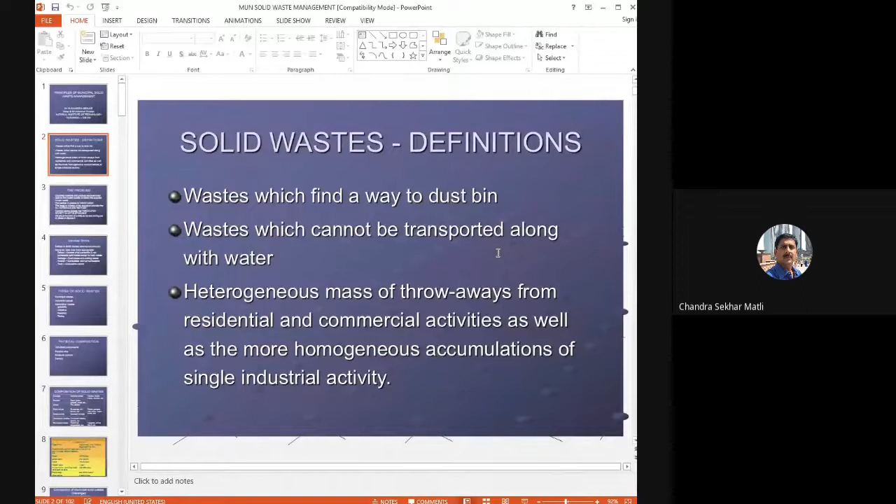Now what is the problem? Why are we talking about solid waste? Because we have been living on the planet for several years, decades, centuries. If you really look at the solid waste problem we have, you find countless materials.

You go and see a dustbin - what do you find? You find paper, food waste, vegetable waste, plastic, thermocol, leather, glass, metal - all kinds of things, at least 10 to 12 items found in the dustbin. In modern society, as you use more and more materials, the dustbin is flushed with more and more different kinds of waste. The additional aspect is about variety, diversity of waste.

The second thing is the quantity of waste. The tradition and practice today is only throwaway - that means you go anywhere today, you find a throwaway society.

You find a throwaway cup, throwaway napkin, throwaway kerchief, throwaway plate, disposable pen - all kinds of disposable items. The order of the day is disposable.

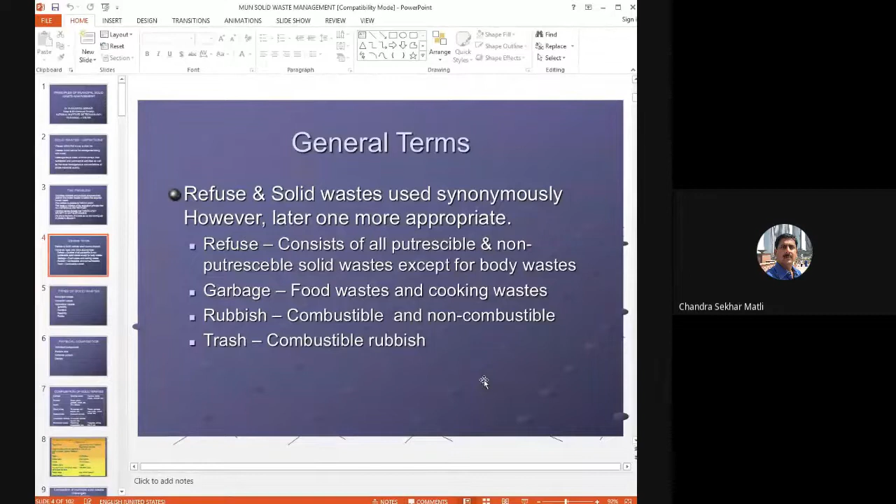Then what are different types of municipal solid waste? You have municipal waste, which is mostly from residential and commercial. Industrial waste is not included in municipal waste because Government of India and several other governments across the globe said industrial waste has to be dealt with by the industry on its own. Municipality is not responsible for dealing with waste from industry. So industrial waste means the homogeneous materials that come from a single industrial activity.

Then you have hazardous waste. There are some wastes which are hazardous, like hospital waste, radioactive waste. So these are some examples of hazardous waste, meaning they are very, very dangerous.

In what way are they dangerous? Hazardous waste essentially has these properties in combination or in isolation. So what are the properties which make waste hazardous? Waste which can ignite or burn, that is what is hazardous.

Waste which are highly corrosive. That means chemically they create action like acids.

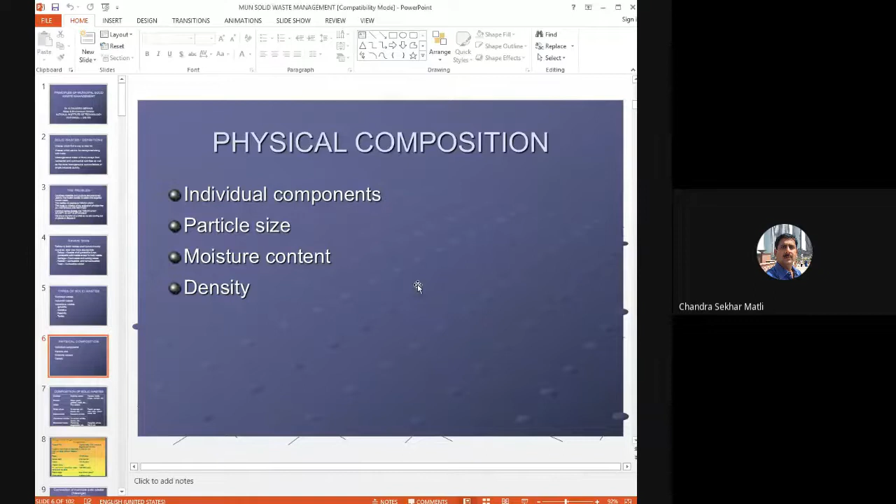Now, when you look at the physical composition, you see what the waste comprises of. I told you garbage. In the residential sector, you have rubbish - paper, glass, plastics, metal, etc. Then ashes, fire residue. With the use of LPG, you are no longer using wood or coal, so you don't have as many ashes, but still ashes can be a component of solid waste. All these items come from houses, hotels, shops, markets, essentially from residential activity.

Then street refuse - that means on the road, which is also part of urban area. So what you get is sweepings, dirt, leaves, etc. Whenever you clean the road, you get sweepings, mostly soil and other materials. Then you get some dirt, some leaves, flowers, and similar things that are thrown on the road. And if you are not a very conscious citizen, you throw paper cups, plastic, anything and everything on the road - all these will be present in street refuse.

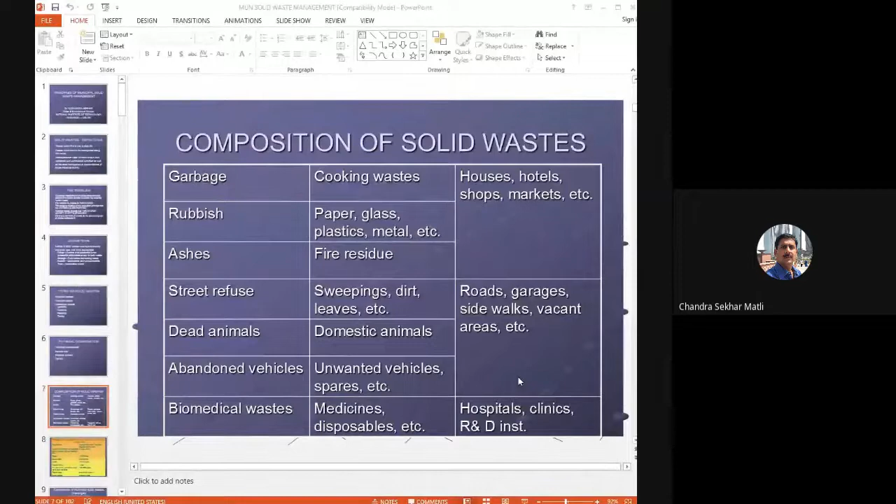So all these are again where you find them in hospitals, clinics, and R&D units, which are linked with the things. So these are general sources and different kinds of materials that you find. But now, if you really look at the behavior of these materials, you see what is the behavior of these materials and why we are really interested in dealing with these materials.

Say, first thing, you find a lot of organic waste such as vegetable and fruit peel waste, leftover foodstuff, leaves and all that. And in India, at least 40 to 50% of the solid waste that you generate, that means out of 0.5 kgs that I was referring to, 0.25 kgs or 0.2 kgs is only organic waste such as vegetable peel waste or fruit peel waste, leftover foodstuff, leaves from the street and all these.

So what is the time for them to decompose or degenerate into different material? Generally 7 to 15 days. Whereas if you go to paper, paper is a significant component that you find in the dustbin. It is 10 to 30 days, which is slightly larger than the food waste.

Then cotton cloth which you throw away, maybe used cloth or some torn away cloth or whatever, that is 2 to 5 months. 2 to 5 months.

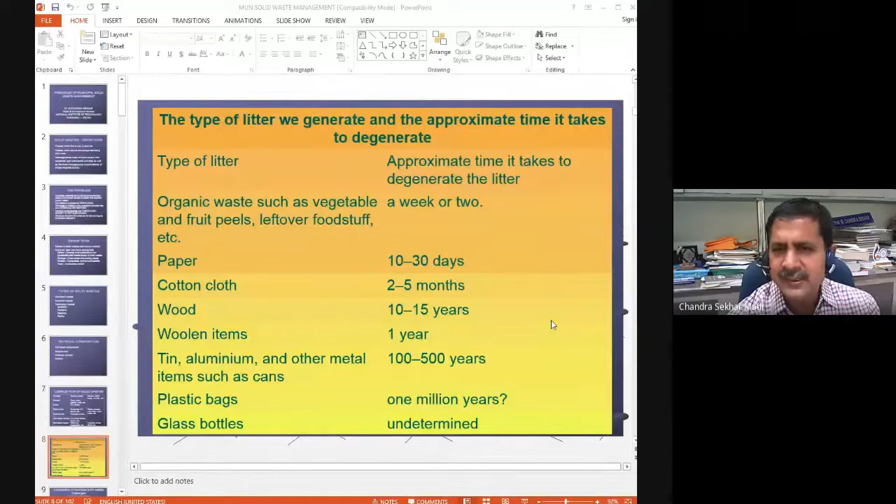Then glass bottles: your soft drinks, your cool drinks, all kinds of drinks that you get, soda, dairy milk, all these, undetermined. That means the time taken for decomposition of glass is undetermined. That means literally it is not possible. So it is not fancy or advisable to throw away glass or to break glass. Right?

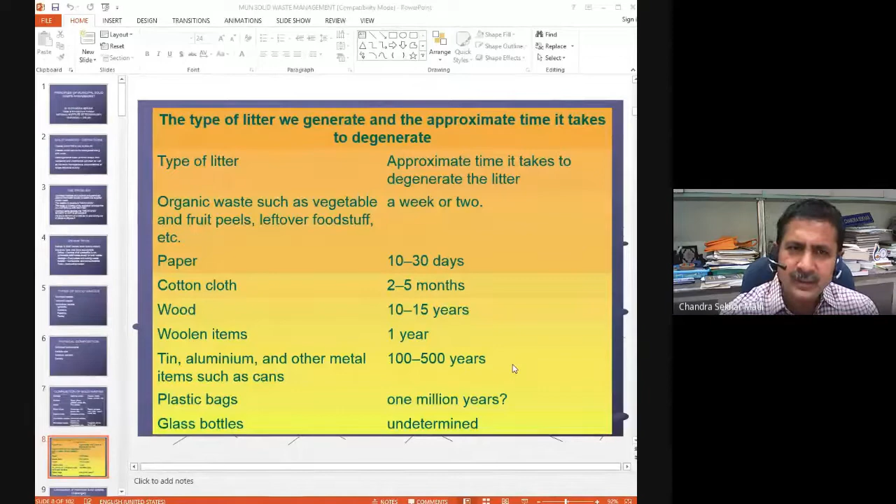So next one. Okay. Now to take you onto the ground. Say in Warangal, we have taken up a study where we have found out what are the different materials found in the municipal solid waste of Warangal. Organic matter, 46%. Soil, that means sand, street sweepings and all that, 36%.

And literally speaking, if you separate organic matter and soil, 82% is gone. Your problem is only 18%. Soil can be easily disposed, no problem, if it is separate. Organic matter can be easily handled. That's what we will be talking about today, which organic matter is supposed to go to composting.

That is 46%, which also poses no problem if it is separated, if it is segregated, if it is present in isolation. Unfortunately, what happens is it is not present in isolation.

Participants are calling me. Hello? Yes? Yeah. For the FDP, if you have any issues, you call my research scholar. I am in the session. Okay. I gave instructions that you should not call me.

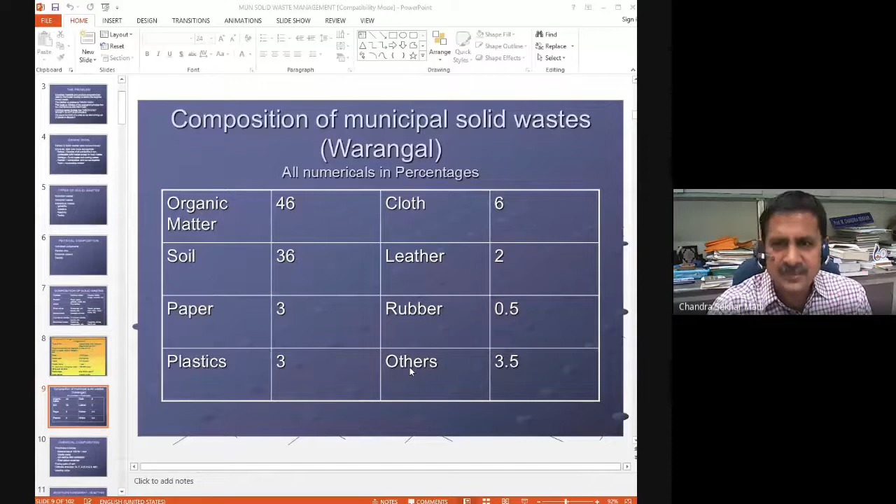Now, you have done your physical composition. That means you have separated materials, you have found out their density, their moisture content, all that. But now the next aspect is chemical composition. What chemically is this material? So for chemical composition, what are the properties that you try to study? First one is called proximate analysis.

Proximate analysis, where you try to find out the moisture that is lost at 105 degrees centigrade for 1 hour. That means when you heat the solid waste at 105 degrees, how much moisture will be lost? Why 105 degrees? Water will go into the vapor state. Then volatile matter, and ash residue after combustion. What I mean by ash residue is, if I burn 1 kg of waste, how much ash will I get?

Say if it is paper, I get less ash. If it is wood, I get more ash. That is why we try to find out the ash residue after combustion. Then finally, fixed carbon: what is the carbon that is remaining in the waste? Even that is important. When you burn, you will get ash, but this ash will be in dust form. I don't want ash in dust form; I want to convert it into a solid form, a brick or a pellet. That is what is called the fusing point of ash: at what temperature the ash becomes a single solid unit.

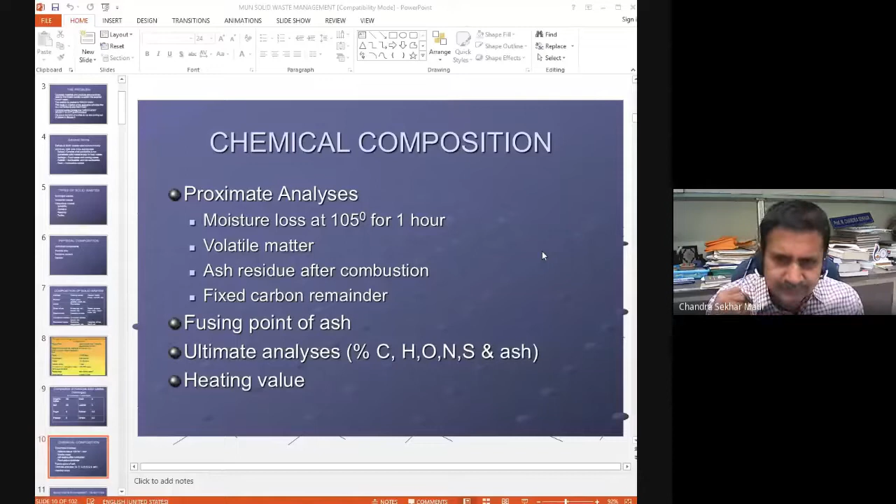Now coming to solid waste management, what are the objectives? What do you want to do with solid waste? What do you mean by solid waste management? First is to identify the types of solid waste and their sources: what different things are present in solid waste and where they are coming from. Next, to examine the physical and chemical composition, the properties I told you to analyze. When you find out their physical and chemical properties, you can decide where they should go and how they should go.

Then the last one, to consider the elements involved in management. I will tell you what the elements involved in solid waste management are. But right now, the third aspect of solid waste management is to consider the elements involved in solid waste management. Now then, what are the benefits of solid waste?

Many times, if you don't know the benefit, you will always have a doubt. Why should I do it? So that is where you come across what you call the benefits of solid waste management. What are the benefits? First one, sustainable development.

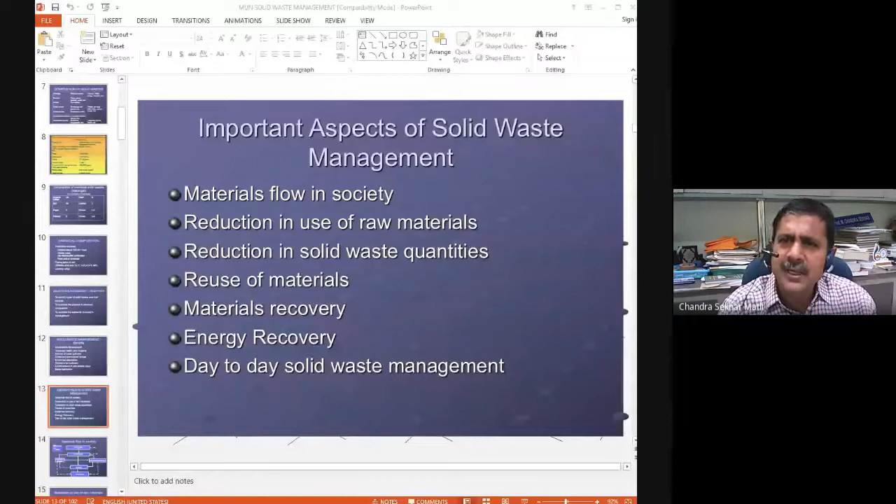So what is materials flow, how do you visualize this? Raw materials come into the society, they go to the manufacturing sector. Say again here, do we have a solid waste management problem in a forest? You don't have. Do you have a solid waste management problem in a village? Not much. In a town? Yes, there is a problem. In a municipality? Yes, you have. In a big city? Yes, it is a big problem.

So when you go from smaller habitats to bigger habitations, the problem is becoming more and more. The reason being, human beings especially are not satisfied with what they have. He always wants to improve the comfort of living, improve the standards of living. He wants to live more and more comfortably day by day. So that is the reason why you are generating more and more materials.

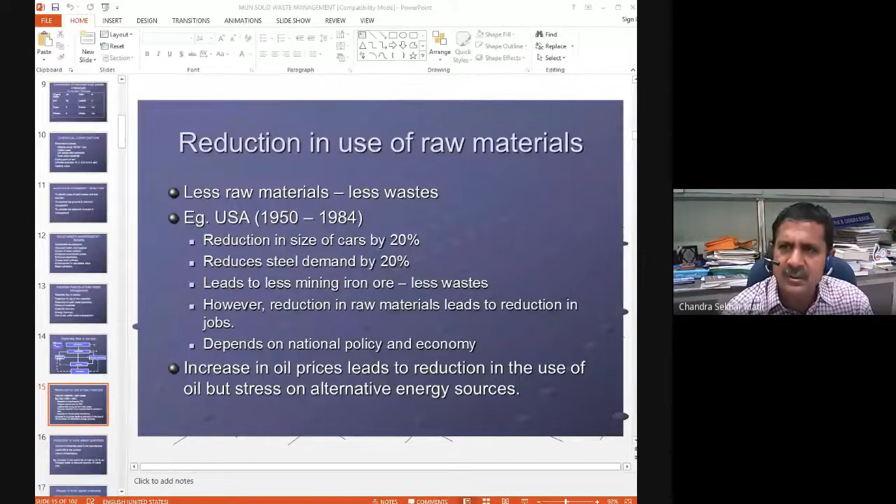Another example we can quote for reduction of solid waste quantities is the amount of materials used in manufacturing. How do you reduce it? Simply by increasing the useful life of the product.

Amount of packaging. Kamlesh, good morning, okay I will join in 10-15 minutes. Okay, fine.

So another thing that comes into picture is increasing the useful life of the product. Again, I will quote an example here. Many of you must be using cars.

In cars, motorcycles, or any other vehicle, you have a tire, rubber or synthetic. The life of the tire, when you compare 20 years back and today, we have come a long way. Earlier, tires used to last for 20,000 kilometers on road. Today, the quality and material used for a tire will withstand 40,000 to 50,000 kilometers.

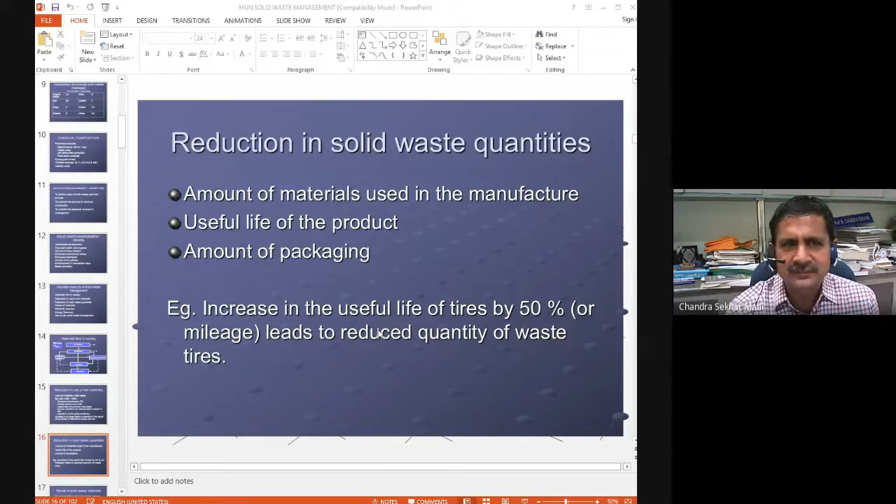Reuse of solid waste materials is another important aspect. In this area, we are doing very well — we always try to reuse plastic bags, bottles, cans and tins to the extent possible, and only then throw them away. So reuse of plastic bags for other purposes, reuse of plastic cans to store vegetables, reuse of bottles — these are important things you can reuse, hence reducing the waste going to the dustbin.

Recycling and reuse — again here, as I told you earlier, we are a little conscious, in the sense that you try to sell your newspaper, which goes for recycling and reuse. Newspaper generally goes to cardboard manufacturing or similar uses. You try to sell metal, you try to sell glass, which also goes for recycling. This reduces the burden on the municipality in handling solid waste, right?

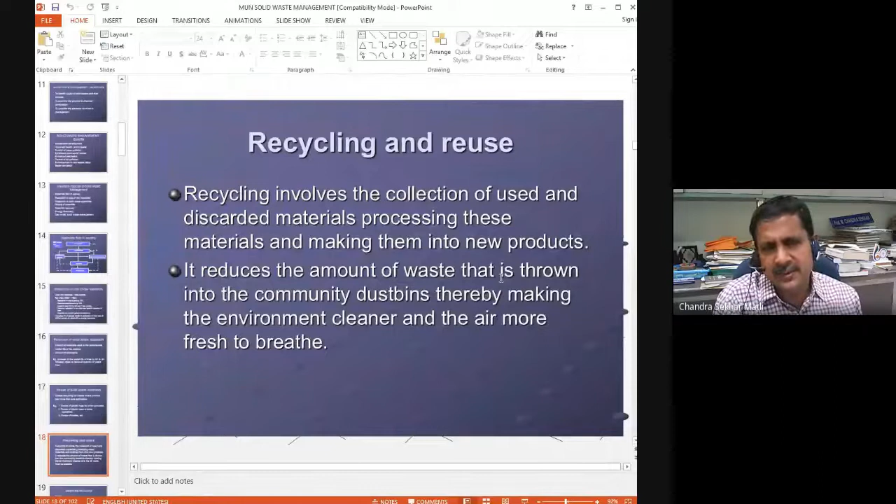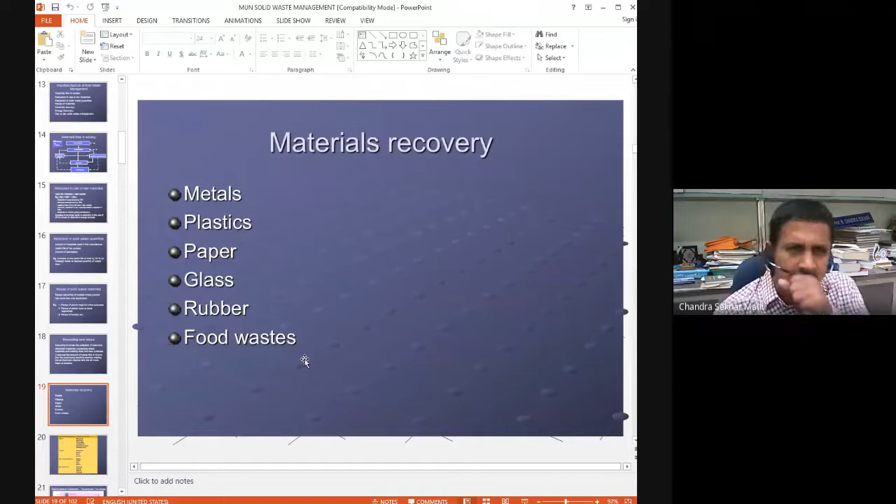So what are the materials that can be recovered? Metals can be recovered, plastics, paper, glass, rubber, food waste. This is the aspect we will be talking about for the next 5 days — what materials can be recovered from solid waste.

So what are the different items in paper? Old copies, old books, paper bags, newspapers, greeting cards, cardboard boxes. In plastic: containers, bottles, bags, sheets. In glass: bottles, plates, cups, bowls. Miscellaneous: old cans, utensils, aluminium, even your iron utensils. Furniture, like plastic chairs and coolers — all these are generally sold.

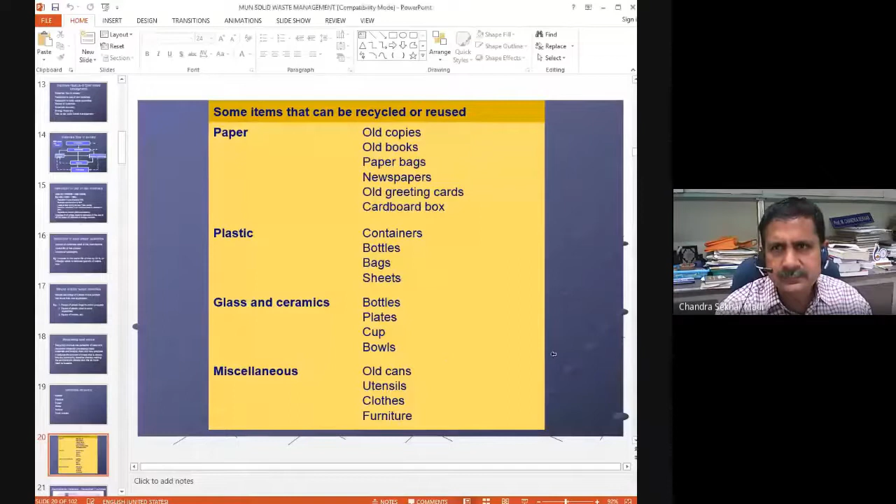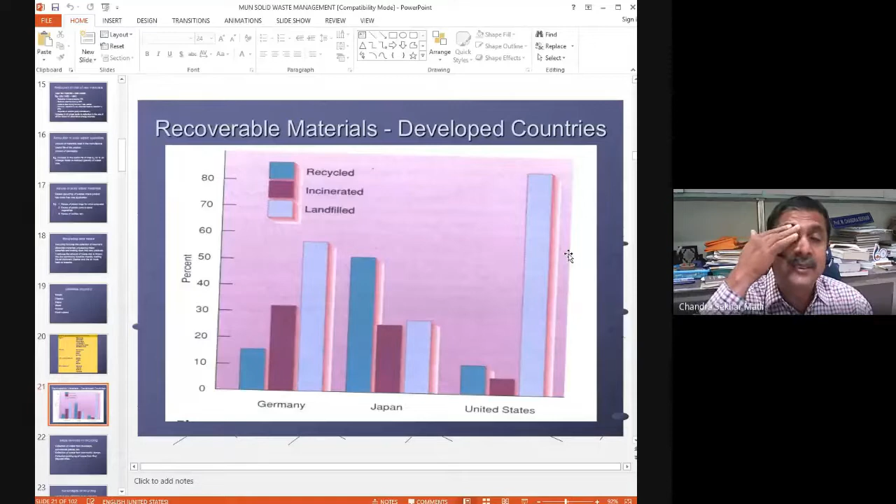Then come to the USA — they are very lavish, their waste production is very high. They don't think much about recycling, they don't think much about incineration. They practice more landfilling because the available land is unlimited in the USA. So as I told you, whatever policy you have depends on the priority of your nation — what is the priority of your nation, right?

Steps involved in recycling: when you want to recycle, what do you do? The waste should be collected from doorsteps and commercial places. That's the example I quoted — in Germany, waste is collected from the commercial place itself, from the shop, rather than going to doorsteps and coming back, which can cause mixing. From a commercial place, it is 100% segregated, meaning only specific items, nothing mixed. Then there's collection of waste from community dumps.

Collecting waste from community dumps is very, very difficult. For example, take Warangal, with a population of 10 lakhs. Say we are producing 0.5 kgs per capita per day — 10 lakhs into 0.5 kgs — how much would that be?

5 lakhs is how many tons? Divided by 1000, that's 500 tons. Is it possible for me to pick up material from 500 tons every day? It is impossible. How many people would I have to employ to pick up that material which can be recycled from 500 tons of waste?

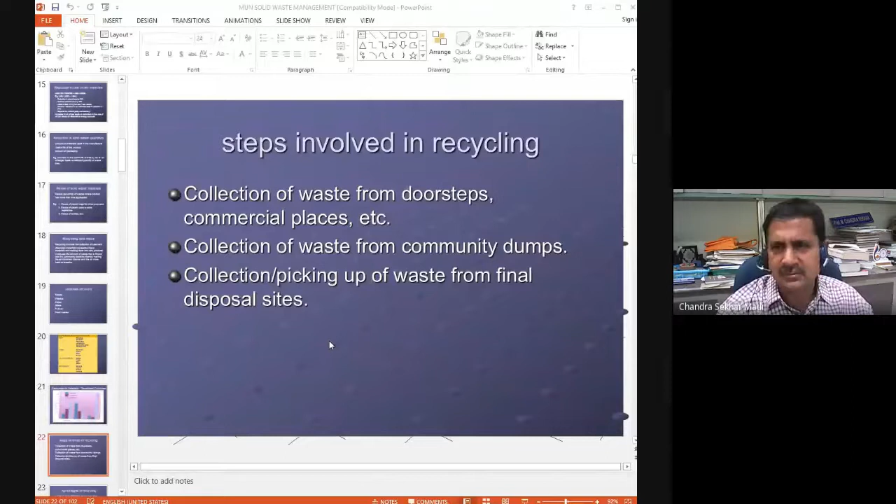So advantages of recycling, why we have to recycle: it leads to less utilization of raw material. That means when you are making paper, 20% recycled paper can go in, which means you are reducing raw material usage.

Reduces environmental impacts arising from waste treatment and disposal. So you are reducing the waste. Instead of 0.5 kgs of waste going to the disposal site, if I segregate, only 0.25 kgs goes. Again, if I take the example, instead of 500 tons going to the disposal site, only 250 tons will be going. And this 250 tons which goes to recycling will give you some regeneration, will give you some material, will give you some value, right? So that is what is to be done.

It saves money, you are getting some amount of money. It reduces the amount of energy required to manufacture new products. I told you, 20% of paper or 20% of plastic or 20% of metal goes for manufacturing. Then it saves you money, right?

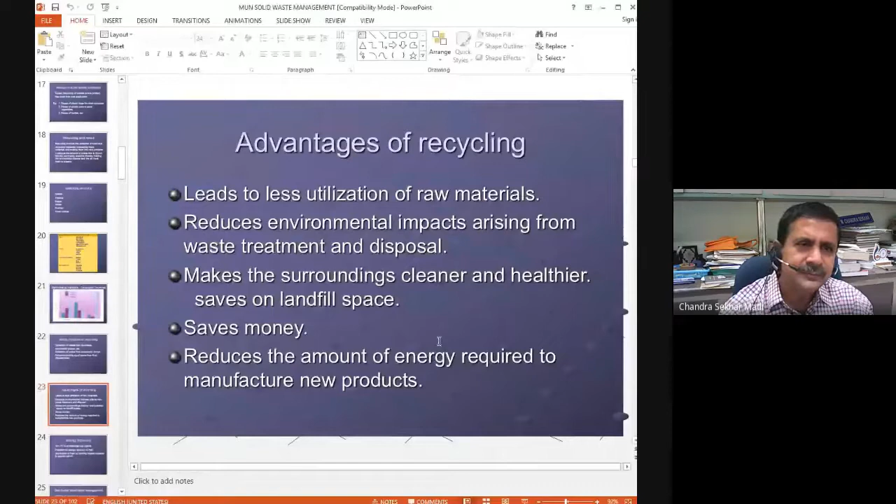So energy recovery is possible. 50 to 70% of materials are organic. Even from the kitchen waste, energy can be recovered. Even from paper, energy can be recovered. Even from plastic, energy can be recovered. So that is why the potential for energy recovery is very high. But what we are doing is we are not practicing it completely.

Generation of heat by burning organic material is a popular option. One historical example I will quote: the cow dung in villages made into cow dung cakes, am I right? Cow dung is made into cow dung cakes, and we can use it for energy recovery. Yes sir, you can use it as a fuel for burning.

The same thing, if you can segregate all the food waste, which I was referring to, 50%, and if you process it and make it as a cake, dry it, use some binder, today you can create fuel pellets from this organic waste using some binder material. Then that will be used for burning to generate energy. Or if you separate the organic component, it can go for anaerobic decomposition like your gobar gas plant, and you can generate methane which can burn again.

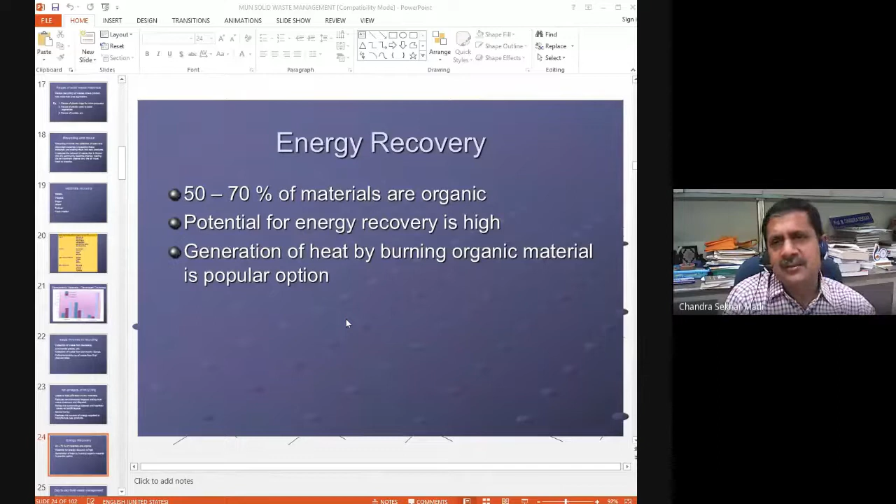Just like somebody is telling, RDF, refuse derived fuel, is the order of the day, where you use new technologies like gasification and pyrolysis. We can also use biomass and agriculture waste for biofuels like bioethanol, biodiesel. These are all the options that are available when you are able to segregate. When you mix everything together, it is not possible to do these practices.

So what do you mean by day-to-day solid waste management? As I told you, the problem is complex. The magnitude of the problem is very big, and it is a very costly undertaking. I tell you, today you go and talk to any municipal engineer, municipal commissioner, or municipal mayor. You go and ask him, sir, what do you think is the biggest challenge that you are facing in your job?

He will never say water supply, because he is also responsible for supplying water to the community. He will never say wastewater treatment, because he is responsible for collecting, treating and disposing wastewater. He will definitely say solid waste management is the biggest problem that I am facing. You go and ask any municipality employee, field people.

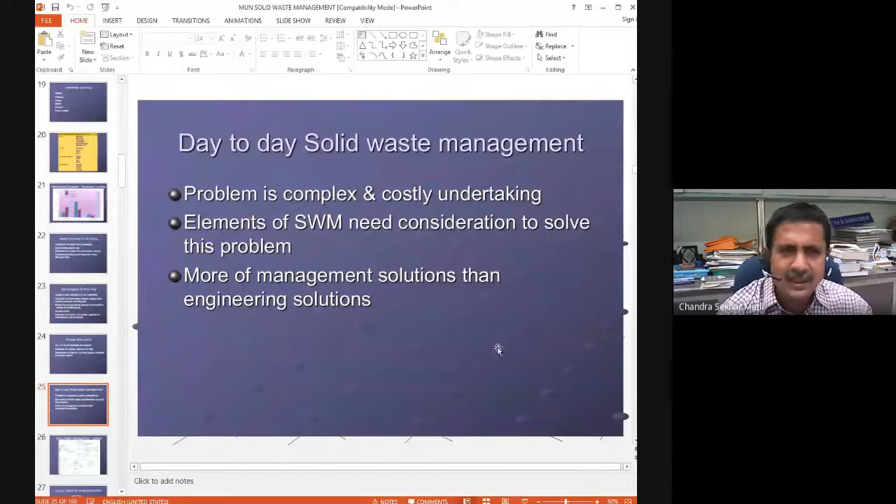So elements of solid waste management need consideration to solve this problem. And most of these solutions that you find in solid waste management are mostly management solutions rather than engineering solutions. Better management. You should be a good manager rather than an engineer to handle solid waste management. Right? So this is the other thing. Okay, these are the elements of solid waste management.

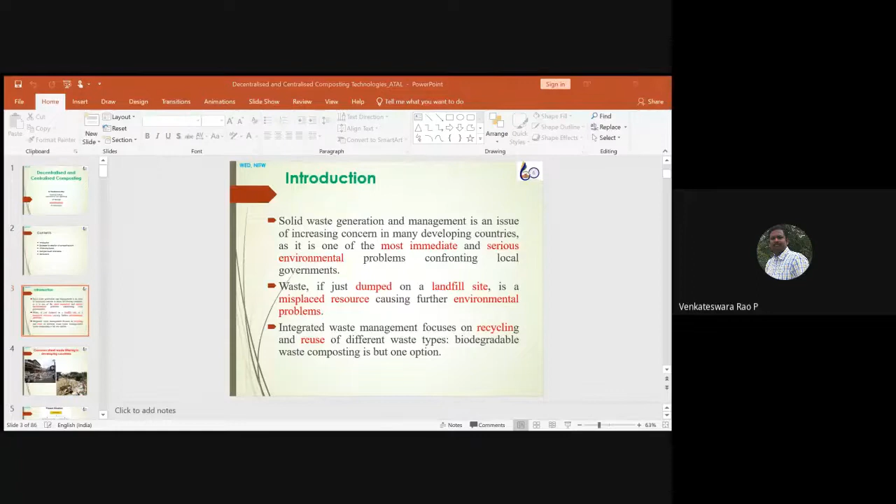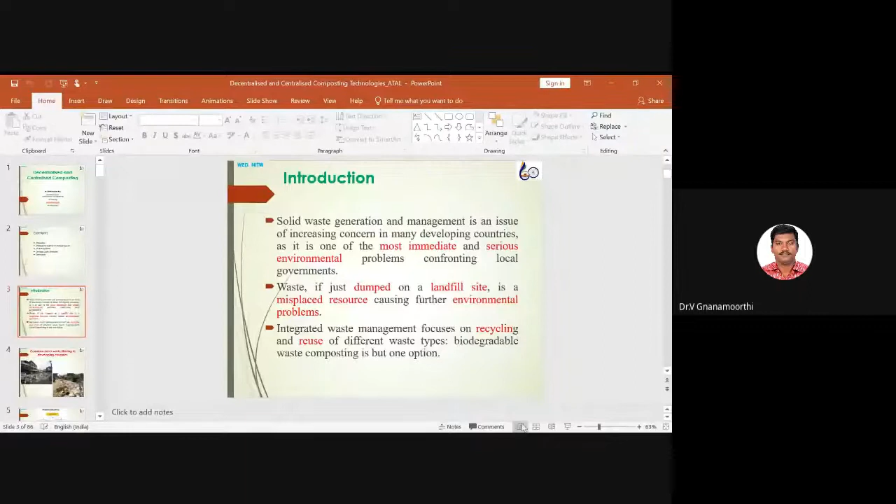Are you able to see now? Yes, sir, we are seeing the introduction page. It's visible, but it's not in presentation mode. Is it in presentation mode right now? No, sir. One second, I will disconnect and reconnect. Okay, sir. Check this. Perfect. It's visible and it's in presentation mode now, sir.

Sir, now your voice is not audible. I can't hear you. Are you able to hear my voice now? Yes, sir, now it's audible.

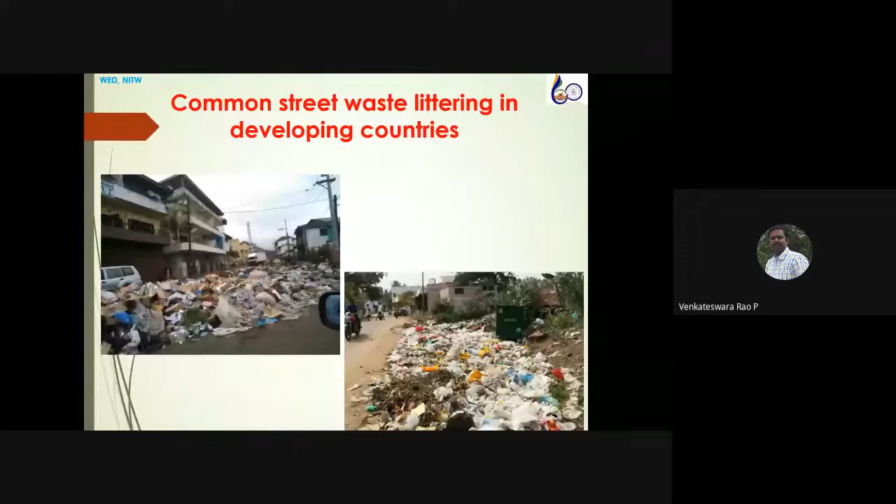Now, if you come to urban areas, take the typical case of Warangal. When you are entering Warangal from Hyderabad, at the entrance you have something called Rampur. There is the official landfill site for the government. What is happening is, not all the citizens, but a major fraction of citizens of Warangal are still not segregating the waste in spite of several awareness programs being organized by the government.

As a result, they are giving unsegregated waste to the waste handlers who are doing door-to-door collection. In certain cases, I myself have seen people handing over segregated waste to the waste handler, but due to lack of maturity, the person who is collecting is mixing the waste. So there are problems from both sides, from the execution point of view and from the generation point of view. As a result, they are getting mixed waste and taking this waste altogether to the landfill site.

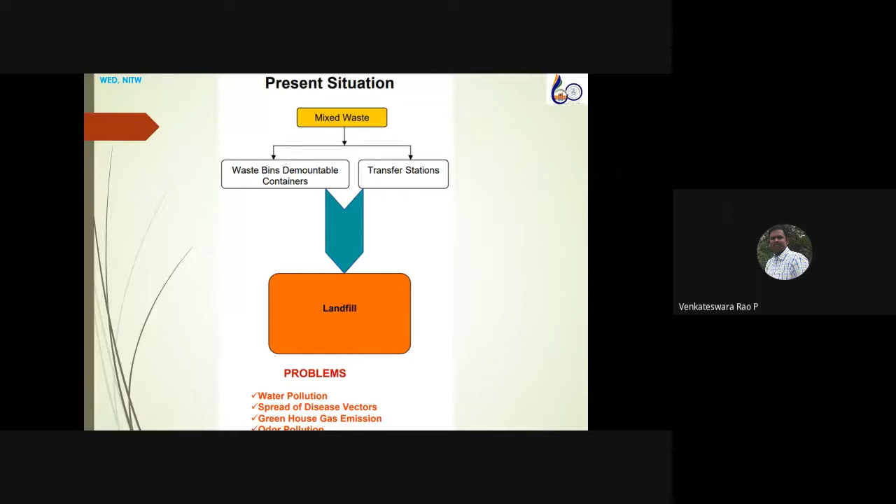Now, what exactly we wanted from present situation? We want transformation. What type of transformation we wanted? If I want transformation, then obviously my next question is, why should I change? Or what are the driving forces? Why I need to have a composting system?

Because see, in my lecture, even though we have lots of problems with the solid waste, and there are n number of technologies available for managing the municipal solid waste, my primary emphasis will be on only composting. And particularly, whether I need to go for centralized composting or decentralized composting, which technology I should choose. So that will be my objective. And for that, what are my driving forces? Why should I go for such a technology? Because having such a technology will bless me with a good environment where I can live happily.

Not only that, if you don't manage the waste properly, it may cause disease that may reflect on the person's health, that may lose the person's working days. Like if you are sick, you cannot go to work. If you don't go for work, you may not earn that day's bread. Not only that, if you are sick, you may have to spend your hard earnings, leading to poverty. So a clean environment or safe environment also gives you poverty alleviation for these people.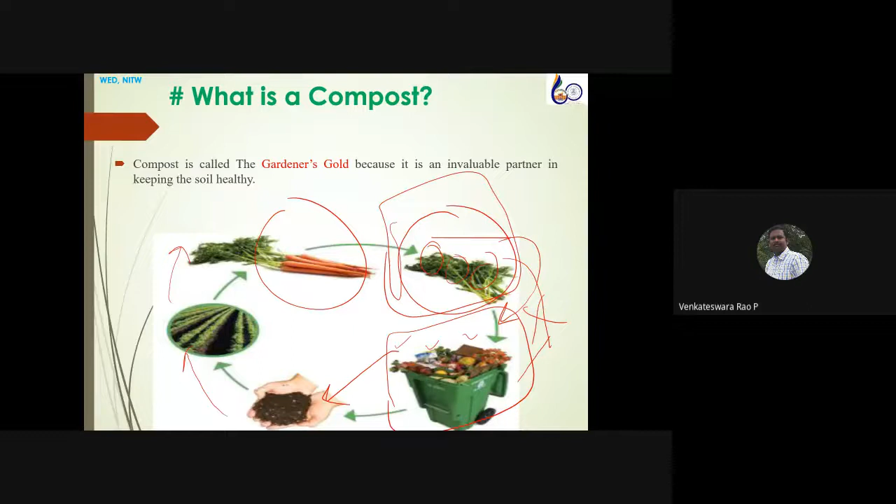So we need to consider several points before making the compost. So what all am I going to consider? The first point is, where will you place your compost bins? That is for decentralized or household level composting. Second thing is the compost pile. The compost pile refers to centralized composting, like for a town together. And how large your compost heap is will depend on many things, like how much space you have in your garden for composting. That's what we call decentralized composting.

The kind of materials you'll be using to make the compost, and once you get the compost, how do you plan to use it? That is also an important thing. Who are the takers, and how much time and effort can you really put from your side for making as well as spending the compost? How will you keep your compost pile spick and span? So these are the points you need to keep in mind while planning your compost facility.

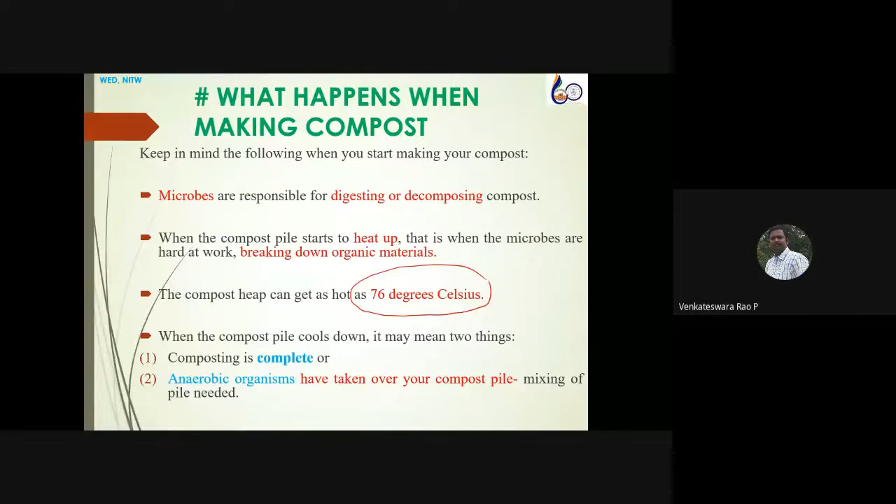Okay, don't worry. So, the increase of temperature in composting is one important feature of composting. As I told you, in centralized composting, we take the material to open space and make waste dumps, waste heaps, particularly with the putrescible matter. When we are making a heap, everybody gets a question: when I am storing material like that, will it not attract mosquitoes? Is it not going to cause nuisance?

And the answer for that is this particular temperature. The inner core of a heap will have approximately 76 degrees Celsius, so if at all mosquitoes land on it and breed, all the eggs will be deactivated. They will be killed. So that is the biggest advantage of this aerobic composting. And if the compost pile cools down, it may mean two things. One thing is, if it is not having temperature, that means the composting is complete.

Or the other alternative is, because of lack of favorable, proper conditions, anaerobic organisms, some organisms which you are not expecting to take part, suddenly start playing a role. In such a case, the compost will start smelling very bad, and the temperature also suddenly drops. Then we have to immediately start remedial actions to regain or re-provide the actual conditions which we are aiming for.

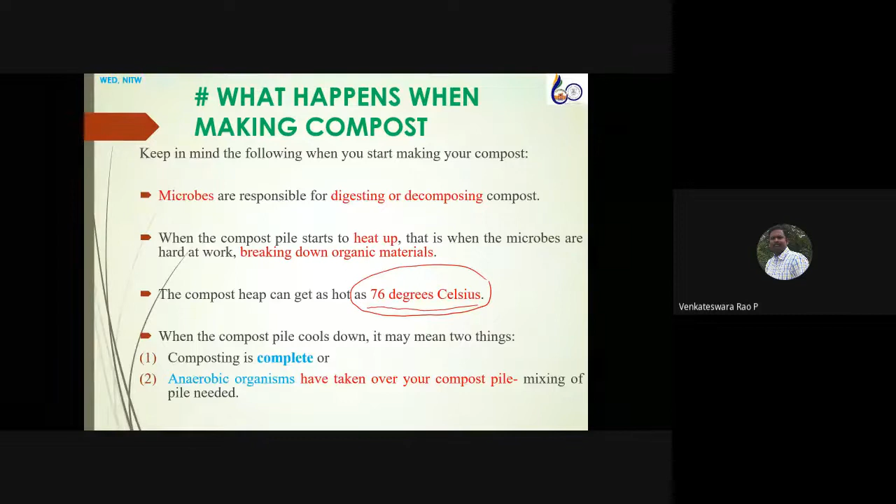And if it is a successful process, after making the compost pile, the heating continues up to 2 days. Subsequently, we have to turn the pile every 2 to 3 days in order to provide proper ventilation and to enhance the decomposition of this organic material.

This type of process we can follow in arid to semi-arid areas. If you want to take up such a composting process in areas susceptible to heavy precipitation for most of the seasons in a year, then open composting is not possible. We may have to protect the compost heap from rain. Otherwise the pile will receive excessive moisture, leading to problems associated with improper composting or illicit dumping. The same problems are going to be repeated even in case of engineered composting. So based on the climatic conditions in an area, we have to plan whether it is a covered composting or uncovered composting.

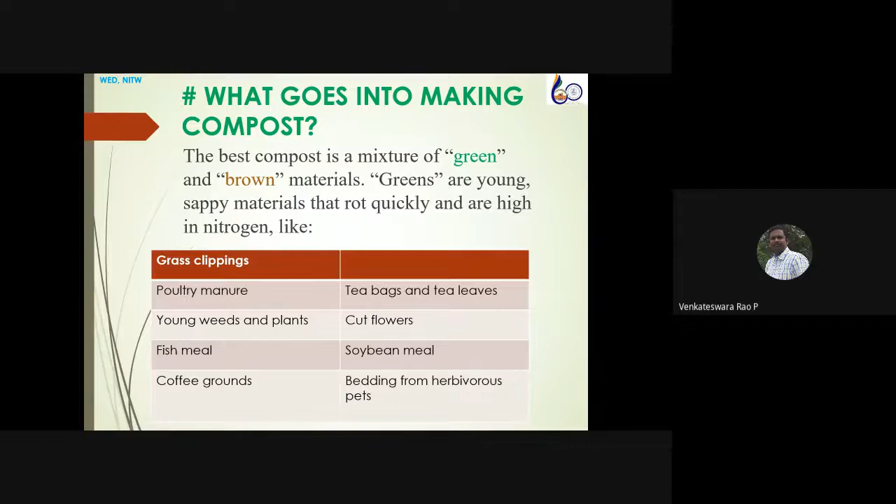There is a terminology called green and brown in composting. The green refers to young sappy material that degrades, mostly putrescible matter, high in nitrogen - examples like poultry manure, tea bags, cut flowers, young weeds, fish meals, coffee grounds, soya bean. And brown includes wood chips, sawdust, egg cartons, shredded newsprint, office papers, shredded tree barks, paper bags, paper towels, which are usually dried and rich in carbon. So what we do is make use of both greens and browns together to prepare the compost.

We have to be a little careful about what not to put. Even if we don't put the proper combination of greens and browns - how much green to how much brown, there are good combinations I will tell in my lecture - there are certain materials which don't fall into green or brown, and if you put them into composting bins, particularly in decentralized composting, that leads to a community problem. For example, if I am doing composting at my household level and not doing it properly, that bin not only smells for me, but the smell also becomes a problem for my neighborhood.

So certain materials are not suitable to make compost. Why? Because they do not decompose - things like plastic, Styrofoam, glass, metal. This anyhow we will not do.

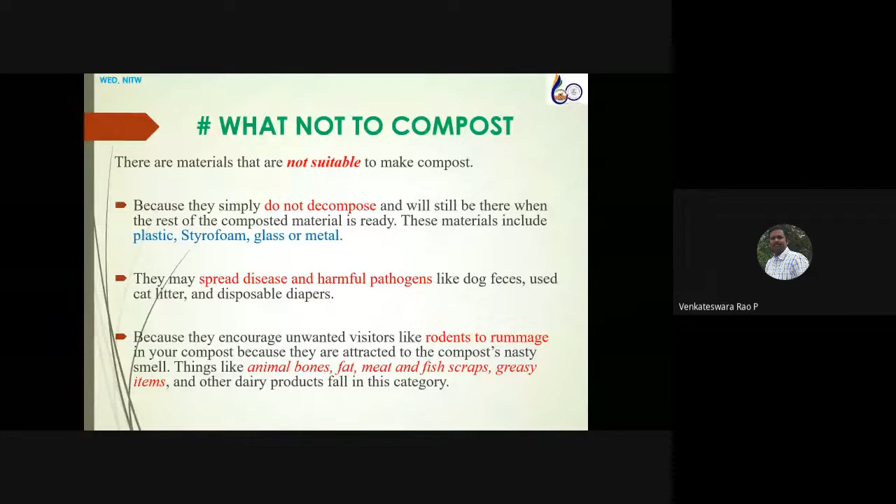How do I know when the composting process is complete? For example, I take a bin, add certain proportions of green and brown, put them in layers, and wait for a certain time. My bin is filled - now how do I know how many days I have to wait, and how do I know the material within the bin is composted? There are certain benchmarks.

One benchmark is that whatever you put in turns into a dark soil. When you are actually filling the bin, you know its identity - you know it's green material, you know it's brown material, you know everything. But by the end, you will not be able to recognize what you really put into it. That indicates the composting process is complete. And once the composting process is complete, that particular material can be used as a fertility improvisation for the soil.

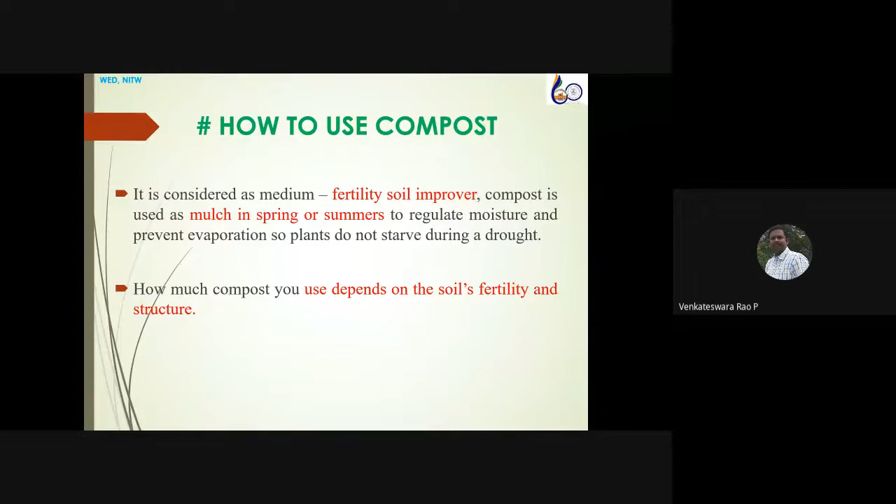And how much compost you have to put in the soil depends on the use of your field. What is the real use of this particular soil? What type of crop you are growing? What are the crop requirements? Accordingly, you use the compost.

Now there are basically two metabolic pathways, particularly for composting. We call it aerobic composting, that is mostly practiced everywhere. This aerobic composting involves conversion of different waste materials produced in our domestic life using a particular reactor, which we call a composting vessel or composting bin. This bin will protect the material from being exposed to the outside environment, and the bin will also facilitate the optimum conditions to develop for this material for its proper conversion into end products.

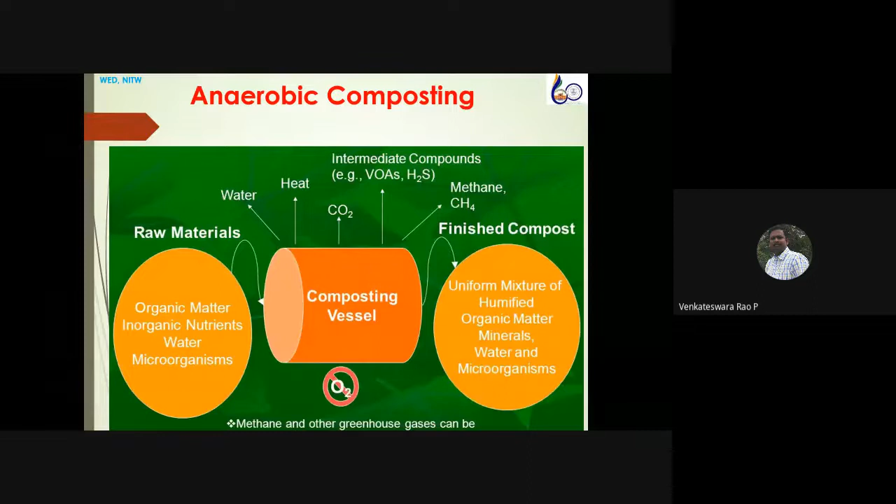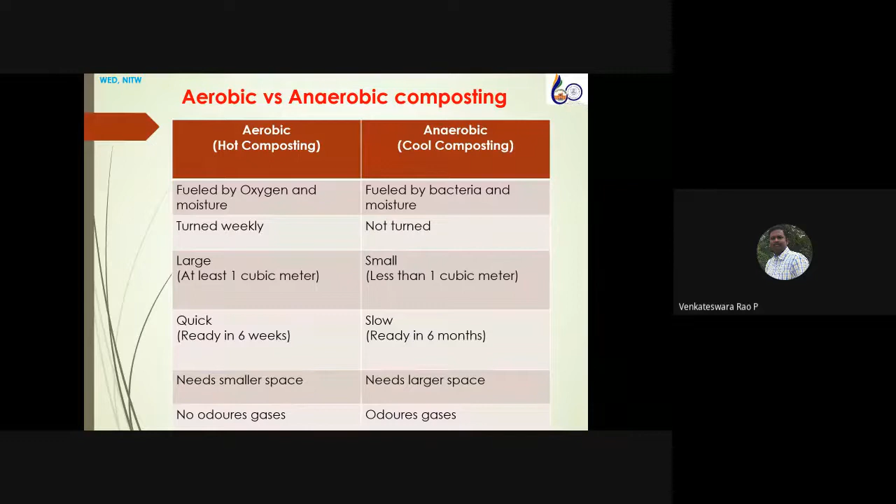For anaerobic, which is also called pit composting, we need a pit dug into the ground, or a reactor which will not allow air penetration. Aerobic composting requires oxygen, whereas anaerobic composting doesn't require oxygen. In aerobic composting, we need to turn every 2 to 3 days based on requirement. Aerobic composting can be any size, there is no restriction. Anaerobic composting, for decentralized or centralized systems, has different sizes. Aerobic composting is much faster because we are supplying oxygen, so degradation rates are much faster. Anaerobic composting is very slow. Aerobic composting needs smaller space because its retention time is small, whereas anaerobic composting retention time is much higher, so you require larger spaces.

Now, having understood what composting is, how do we execute it? What are the different benefits we get from the composting facility? If you want to really plan a composting technology, technically it is something like waste generated at one point, or different, say waste generated by the community. It's simply collection, transportation, managing. Seems very simple to you.

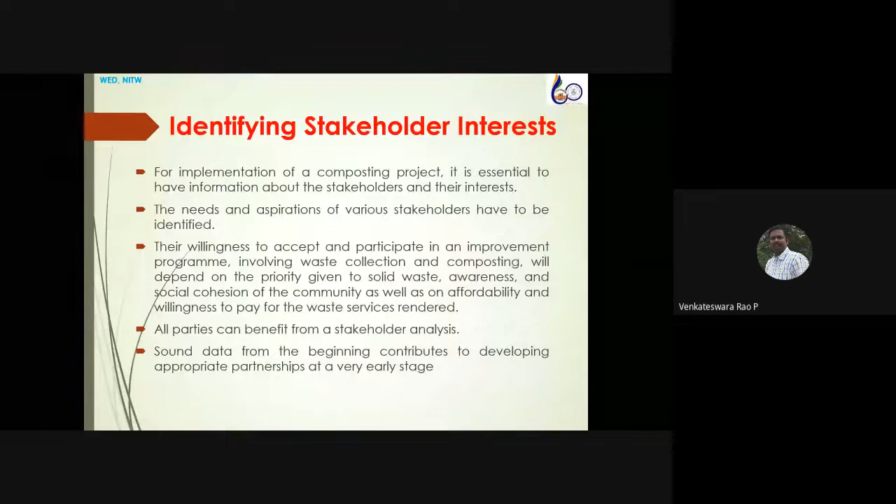And their willingness to accept and participate in improvement of the program, completely from waste collection to finally composting, and finally delivering the composted product to the end users. We also need to get sound data from the beginning, which will help develop appropriate partnership at the very beginning itself, rather than having a difference of opinion at the end. This will bridge the gap between your planning and implementation.

There are different models available which can be used for successful implementation of composting. You can have resources from the public sector, private sector, and non-governmental organizations.

Who will take active part, and whose responsibility is what, depends on the stakeholders' interest, who the funding agency is, and what type of model they are implementing. Government and municipal authorities form the public sector, while the private sector includes many companies, like in India we have Ramky, L&T. Coming to non-governmental options, even households at the decentralized, household level can do composting.

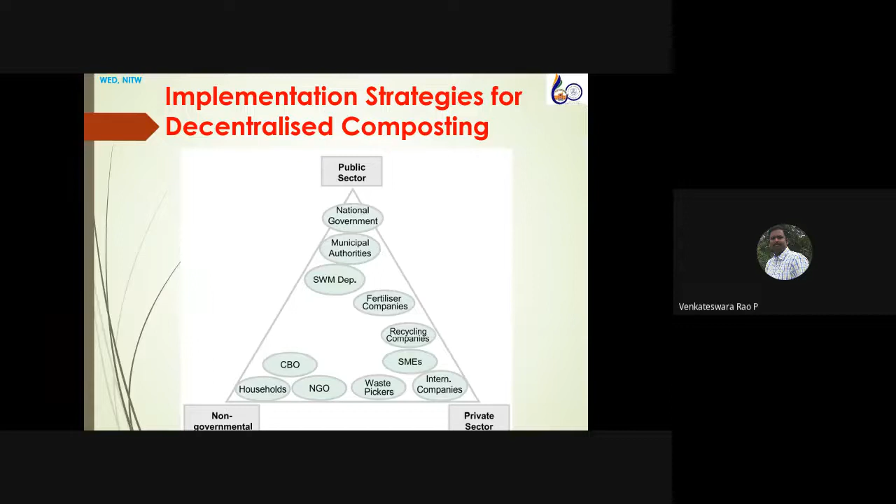There are some 10 main questions for implementation of composting that we need to answer. So before planning any facility, we need to answer these 10 questions. The first question is...

Does a primary house-to-house collection exist in the municipality? That is the first question. How do we collect the waste? Do you have a formal collection system, or do people have to take their waste and put it in a common community dustbin? Are they involved in source segregation? What type of support, and who is the funding?

Is any land available for the composting site? Particularly in case of centralized composting, how do we carry the waste from the point of generation to the terminal management point? How are these roads connected? Are the roads good?

Are people aware of waste mismanagement? Not that somebody will theft your waste, but we frequently see in urban areas people burning the waste. If people burn it, that's one issue. And sometimes the person who is supposed to collect the waste himself burns it, which is more dangerous, even knowing about the dangerous effects of burning waste.

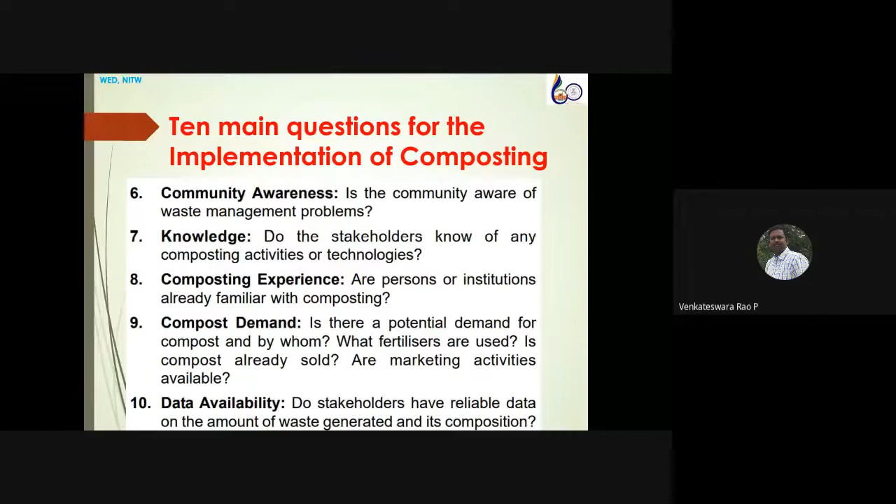What type of knowledge do stakeholders have on how to implement composting technology? What is their composting experience? Are any trained persons available for this composting or not? And what is the demand for this compost? If we have data for all these questions, that will form the basis to plan our composting facility.

Sometimes to answer these questions we may have to organize different community meetings, conduct structured surveys using a questionnaire, and make field visits to check land availability and shortlist sites. This will help us understand how to approach and inform the community, and evaluate the community's willingness to participate in the project.

We can also get ideas and concerns of the beneficiaries, such as problems in waste collection or compost quality and how to address them, and assess the community's willingness to cooperate and to what extent.

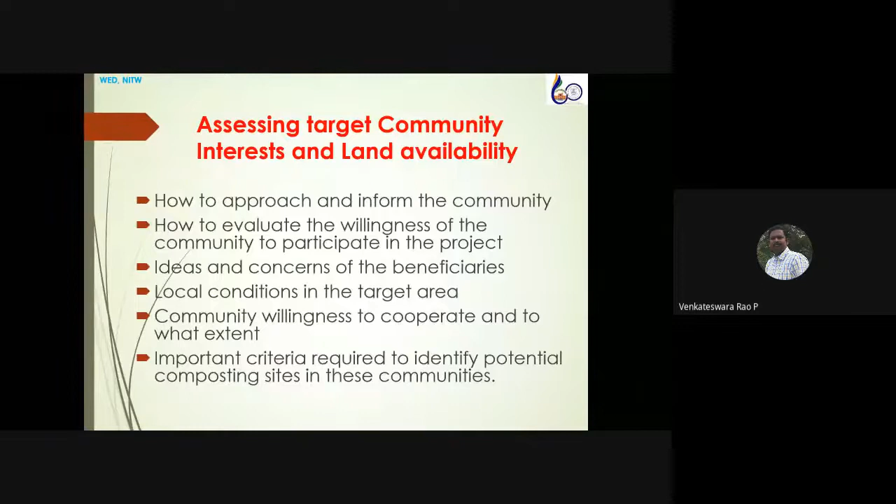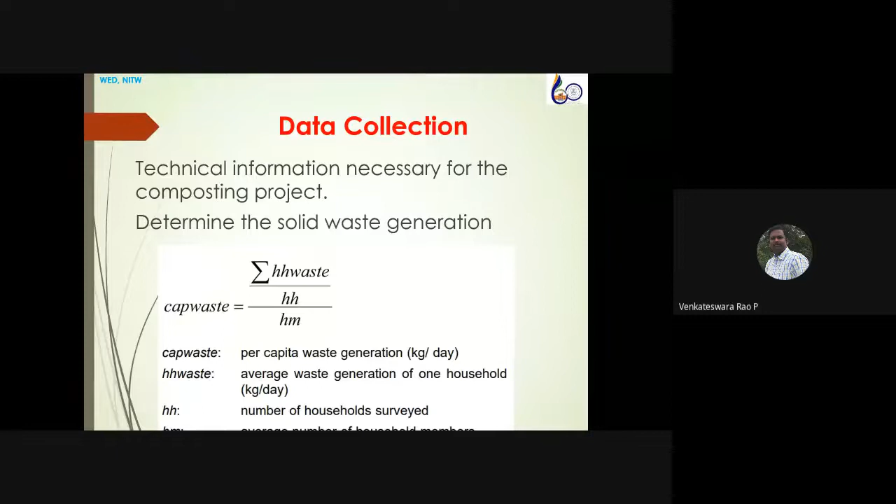We can use some equations to collect sufficient data, such as the quantity of solid waste generated and its quality through physical and chemical characterization. As Professor Chandrasekhar mentioned earlier, physical characterization gives you moisture content, density, and the fraction of organic to inorganic matter, while chemical composition gives the ultimate analysis like CHNS.

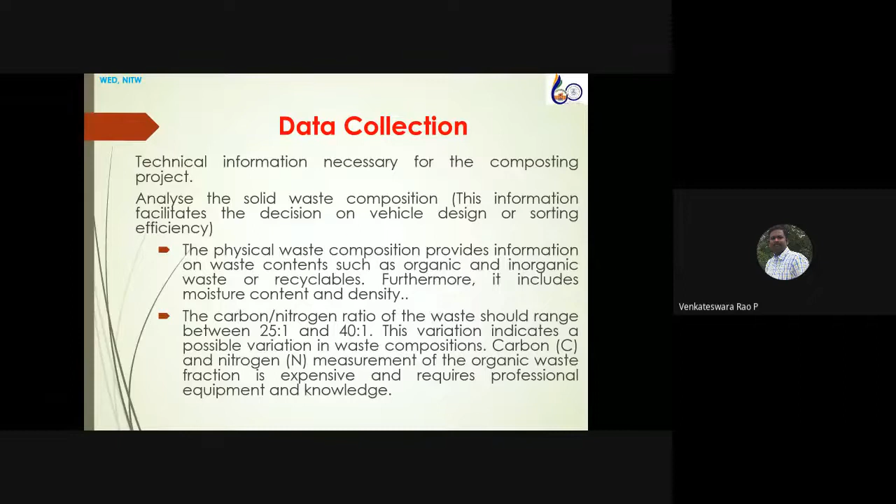Is it possible to do elemental analysis for all waste handling facilities? It may not be possible for all facilities to have an elemental analyzer, but the good thing is the approximate carbon to nitrogen ratio is already known for most types of waste collected. If we can quantify the sub-fractions, we can assess the likely compost quality, giving us the green and brown content, nitrogen and carbon values. These thumb rules help us mix the proper carbon to nitrogen ratio in the right proportion.

Not only waste collection, we need to look at the possible sites. If you ask me the question, sir, how do we locate a site for a composting facility? Well, strictly speaking, if we want to set up a composting facility at any point of time, anywhere in the city, the neighboring people will always oppose, because they may not have enough confidence that the authorities will be able to maintain the process as they thought of. That is the social angle and political angle.

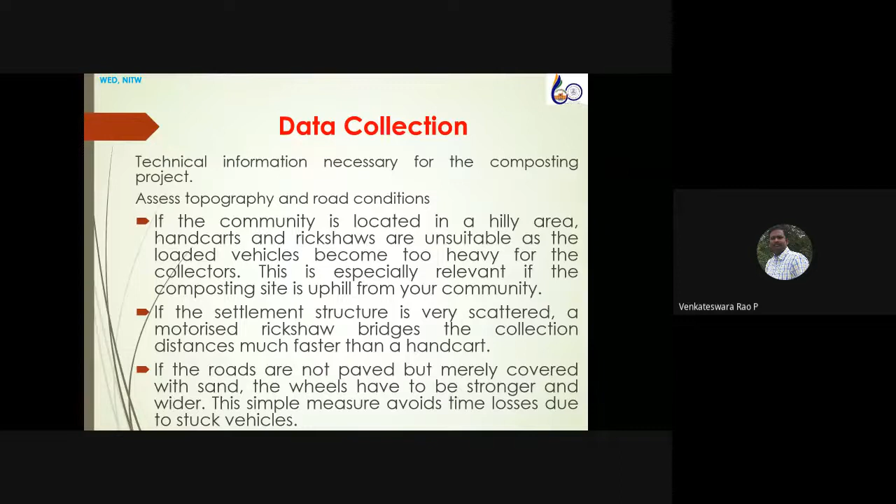And from an engineering point of view, there are certain points which we need to keep in mind, like what type of topography, whether vehicles can reach, whether roads are there. By considering these points, we can identify the site. Once we identify the site, the next thing is we need to prepare a business plan, like who will operate. Is it owned by the municipality and operated by the municipality, owned by the municipality and operated by the community, or completely privately owned, like a complete outsourcing of the entire activity?

And as I mentioned earlier, the different scales of waste composting models. If the facility is more than 11 tons per day, we call it large scale. Medium scale is 3 to 10 tons, small scale 3 tons per day. And households: in a family of 4, we may generate approximately 1 to 1.5 kilos per day of putrescible matter. That can be very small scale, called decentralized, or household bins.

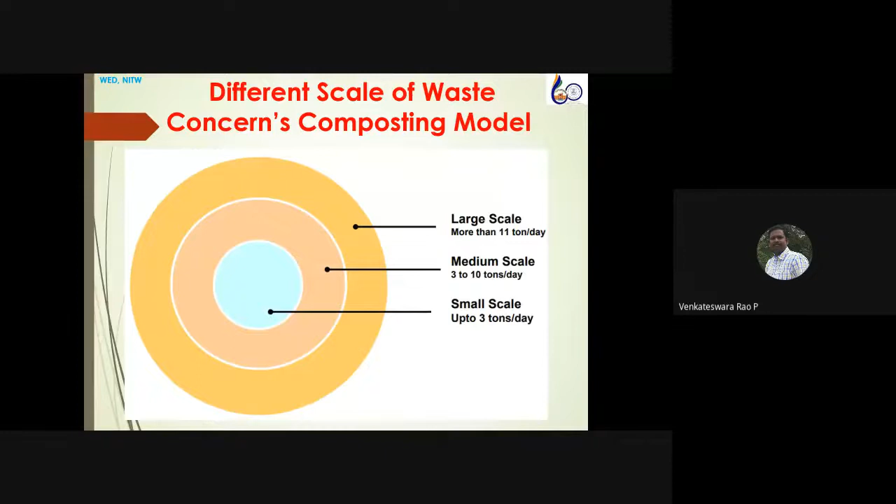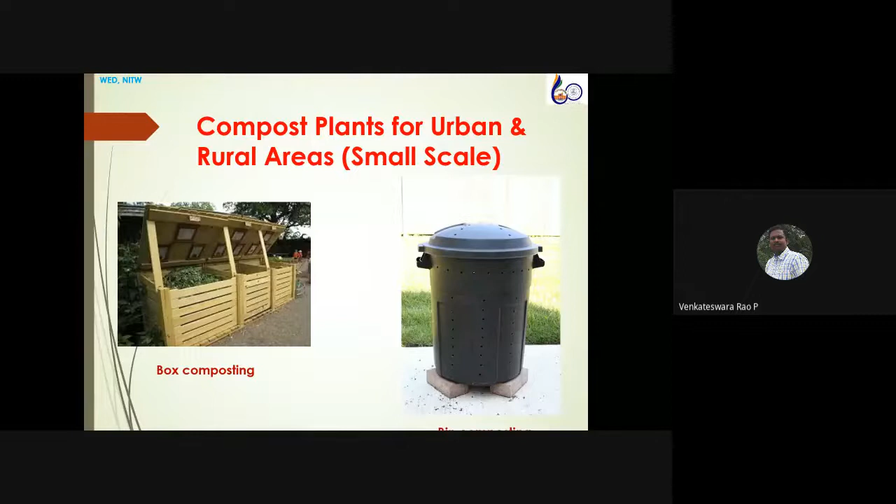You can see these two figures, which we can use for households as well as rural areas for a mix of 2-3 houses. The left hand side shows box composting, whereas the right hand side shows bin composting, the composting bin. The holes will facilitate the proper supply of oxygen to the composting material.

You can see how a person who is operating the bin need not have complete technical knowledge of the entire operating process. But the engineered system shall be able to help even the illiterate to use the system. And sometimes having this type of technical equipment will make us study the systems better for their implementation.

Sir, one question. Yeah, please. Sir, when we are composting organic or inorganic materials, we take into consideration whether the moisture content is right, the aerobic conditions and all this. But do we consider sunlight? Without sunlight, can it be composted or not? Is it important or not?

Yeah, surely I'll answer your question. Just give me another 10 minutes. Let me complete my lecture, then I'll keep the floor open for discussion, and at that time I'll answer your question. Okay, no issues. I'll discuss that point as well, sunlight also. Thank you. Okay, sir. Fine.

So for effective implementation of the composting process, we need to follow a structured path: proper collection, sorting, piling, composting, and maturing of the compost. Maturing basically means the degree of readiness. Once it is ready, we need proper screening to remove unwanted materials or undigested particles if present. Any commercial viability of the product depends on its quality. So to improve the quality, we do screening, then bagging, and finally selling. These three activities we call marketing.

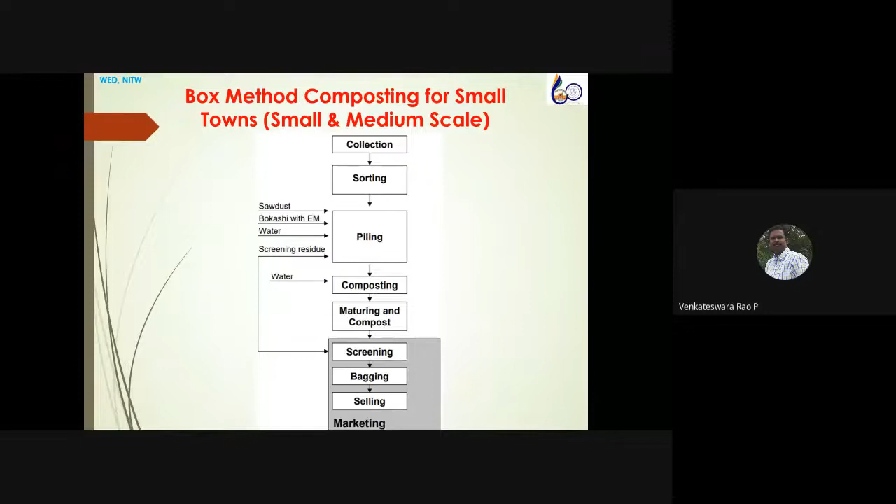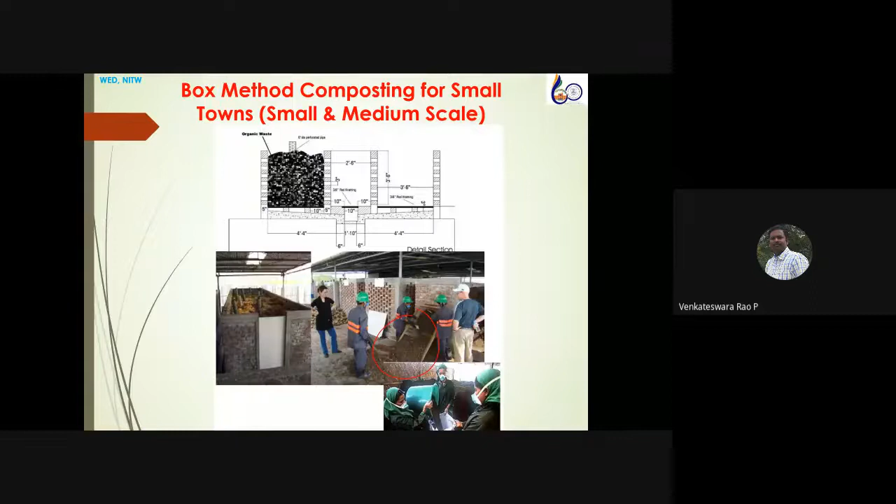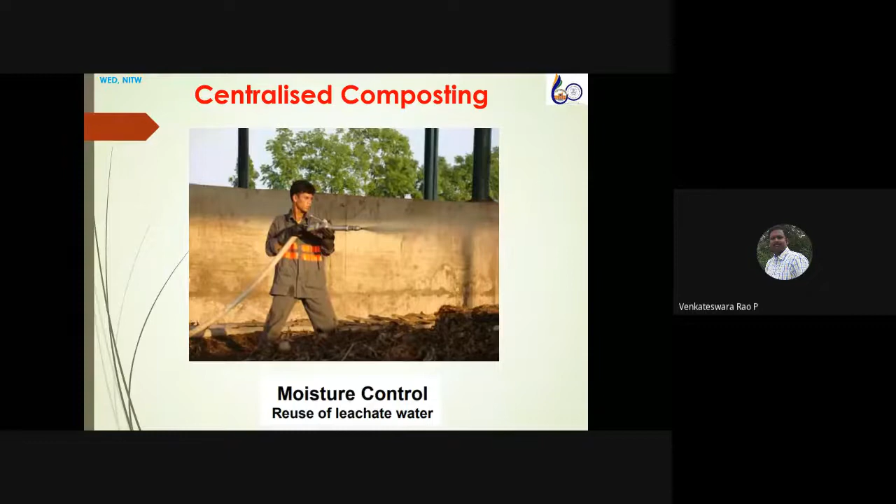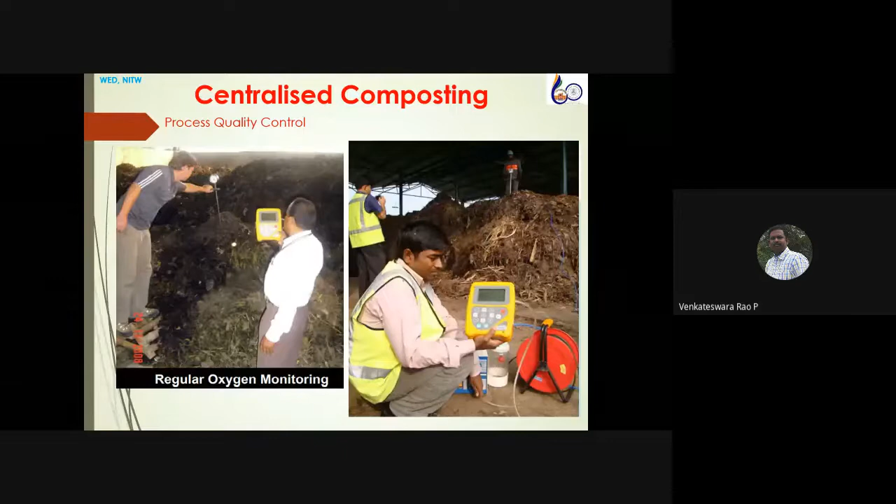And sometimes we may also use the leachate generated from composting to improve the moisture, because this leachate not only enriches the moisture content, it also supplies active microorganisms. We may also look at temperature control, and we have to monitor the oxygen levels. If the oxygen levels are very low, we may have to use forced blowers to supply external oxygen. Something like this.

And once we get the compost, then we will check its readiness, whether it is matured or not. And once it is matured, then we do screening, and finally we do packing and selling. And approximately 1 ton of organic waste will give us approximately a quarter ton of composted harvest. 3/4 material is lost, is digested.

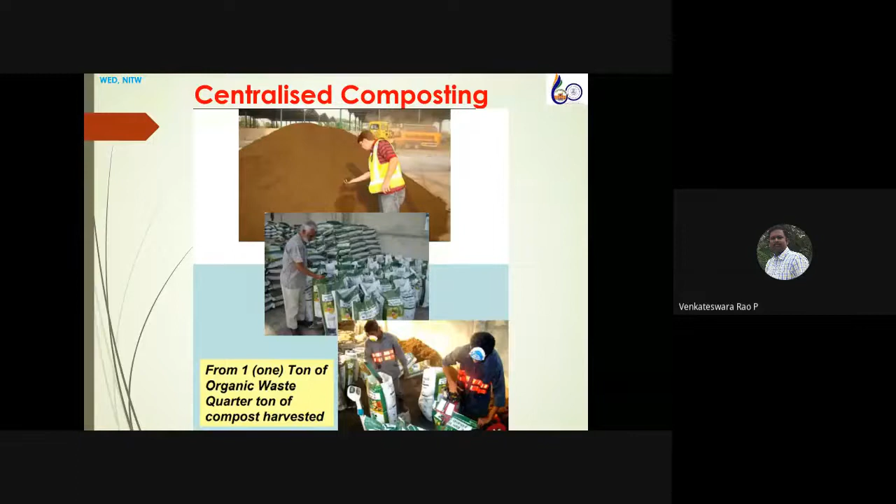Some of the moisture will be lost. Something will be screened out. Something will go into landfilling. Altogether, we get approximately this; this is a rough formula.

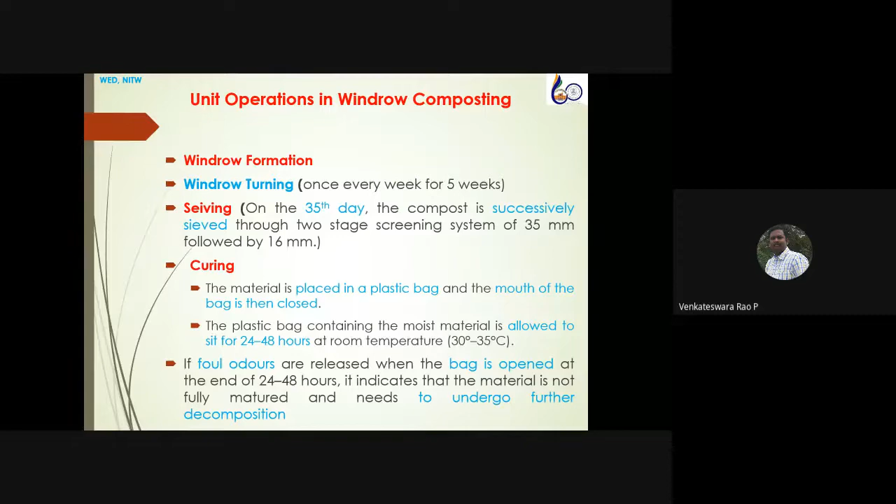And with reference to this windrow composting, there is a separate session on the composting technologies that will be handled by Professor Hariprasad Reddy subsequently. Then he will talk about all these points. So this is what we call windrow, as it is simply available. I am just showing it to you. I can also show you how the turning takes place with the help of a machine.

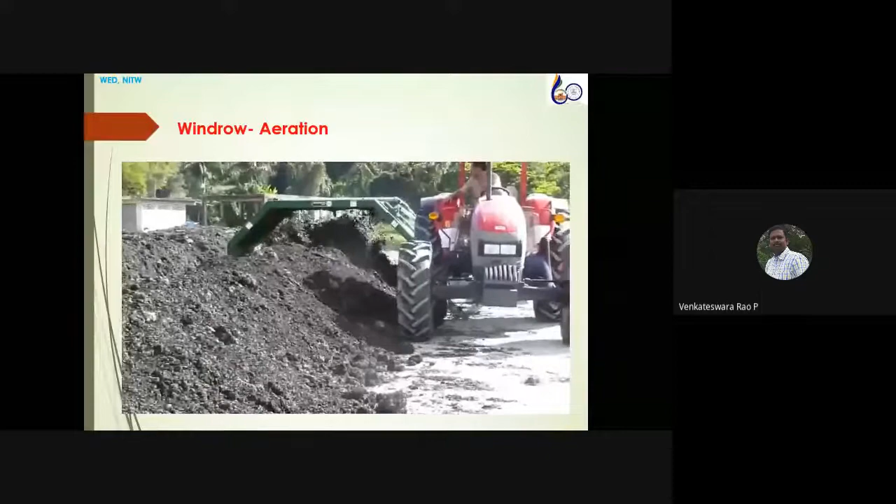Are you able to see the video? Yes, sir, clear.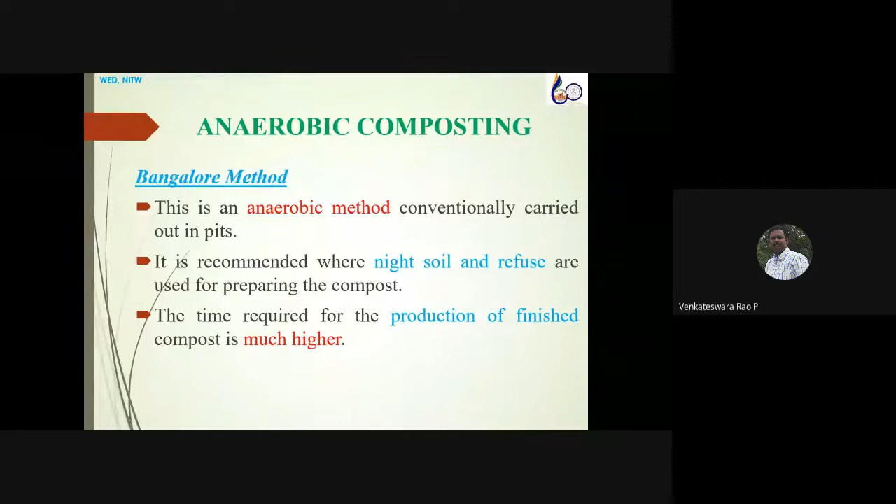So this is called the anaerobic method, which is also called the Bangalore method. What happens is we dig a pit and put the material in that. Basically, when we have night soil and refuse, then we go for this Bangalore method. Make a pit, fill the material, cover it with the top soil, leave it for almost 6 months. Then we get compost. And another thing which we have seen in our decentralized composting is vermicomposting.

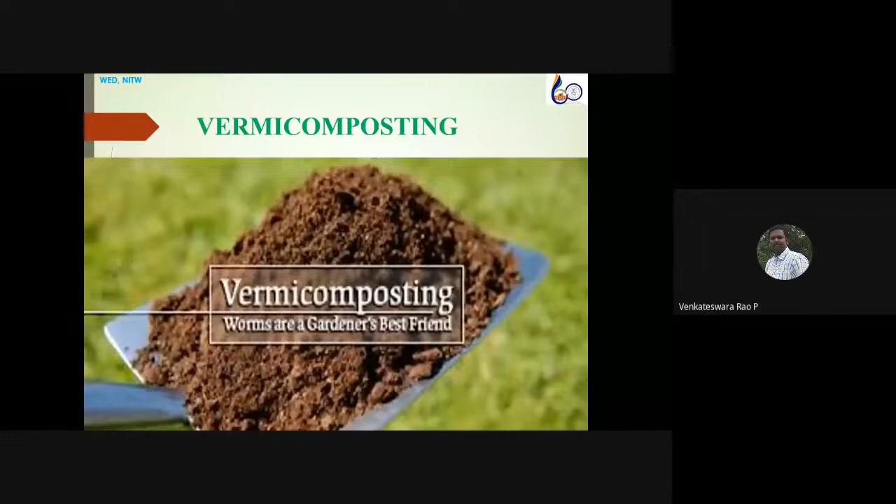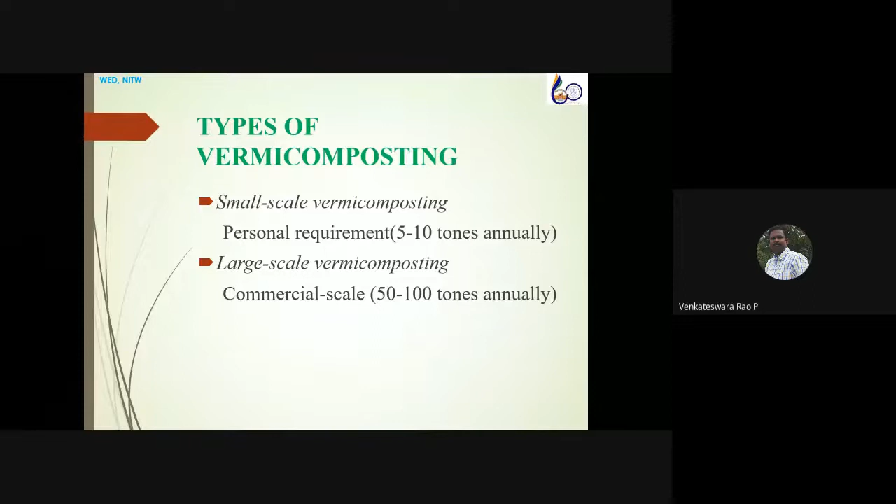So we use the natural worms: red earthworms, night crawlers, Perionyx excavatus. These are the different types of earthworms which are available. Use them for generating a better quality of compost. Once again, in vermicomposting, we have small scale vermicomposting and large scale vermicomposting. And in vermicomposting, we have the bed method and the pit method. This is called the bed method. This is called the pit method.

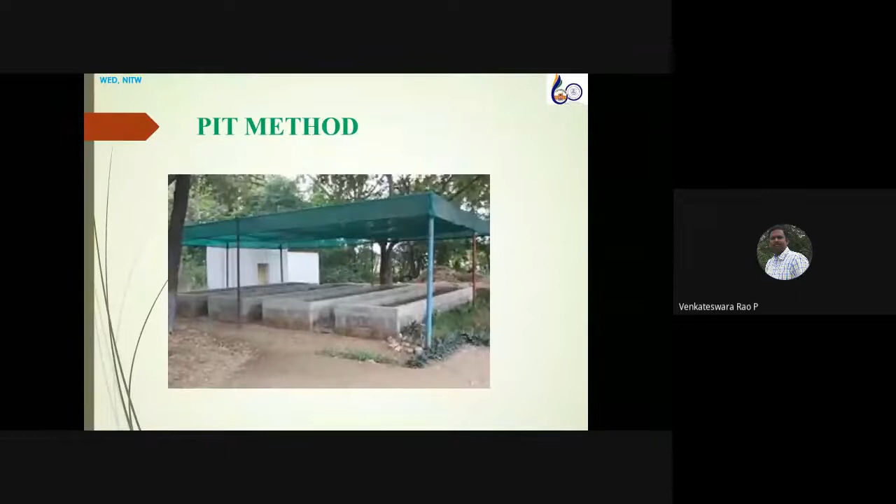So here also, particularly as we are growing worms, we have to be extremely careful about the moisture content. And from normal composting to vermicomposting, the only difference is that in normal composting, the process can have little variations. The quality of compost can have some variation. But in the case of vermicomposting, if the variations are beyond the tolerance limit, these worms will die. And it takes a lot of time to regenerate the worms.

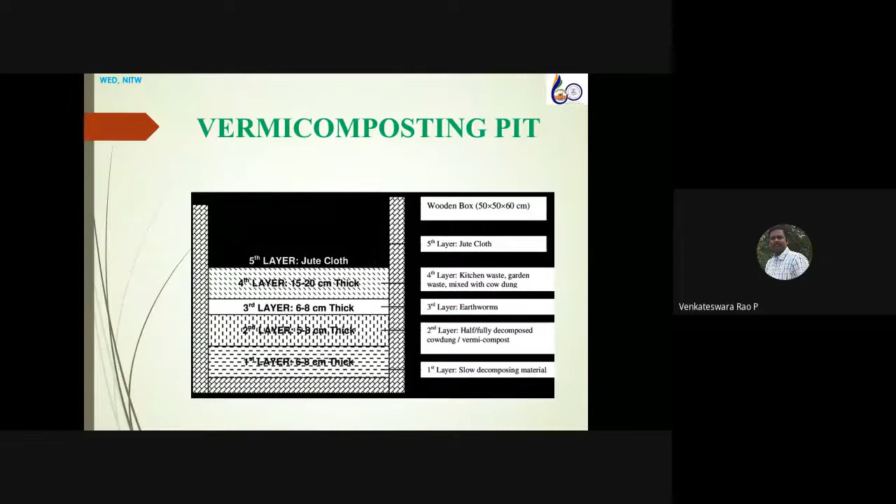And you cannot allow the temperature to increase to 60-70 degrees centigrade in the case of vermicomposting. The pile has to be very small. So even though the operating principles are more or less the same, the actual field conditions will be different. So this is the vermicomposting pit, the specifications, and how you should fill the pit with each material.

And of course, in vermicomposting there are certain problems, something like dying of worms. The problem could be not having enough food, so we can provide proper food. And it may be too hot, so provide proper shade and proper sprinkling of water. Sometimes we may get a bad smell; then you need to provide proper air circulation. So by maintaining these conditions, we can preserve the worms as well.